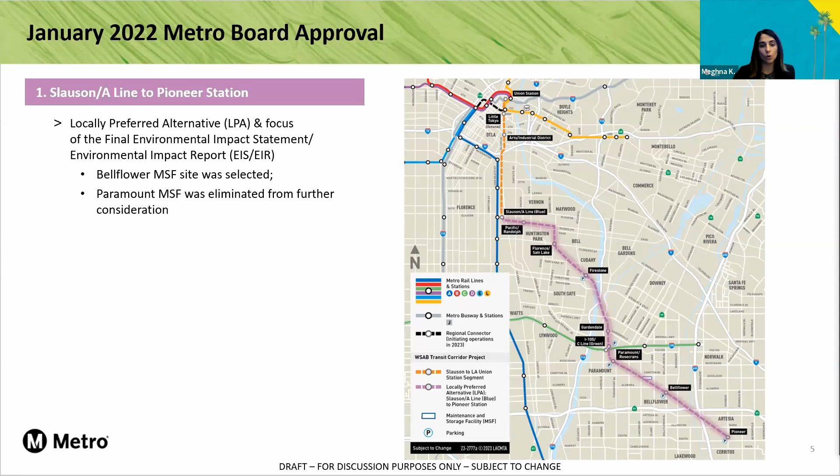Going to the segment between Slauson A Line and LA Union Station, the Metro Board selected LA Union Station as the ultimate northern terminus of the project, and directed staff to conduct a separate study to evaluate cost-effective alignment solutions. We are working on this separate study right now, and findings will be presented to the board later in 2023.

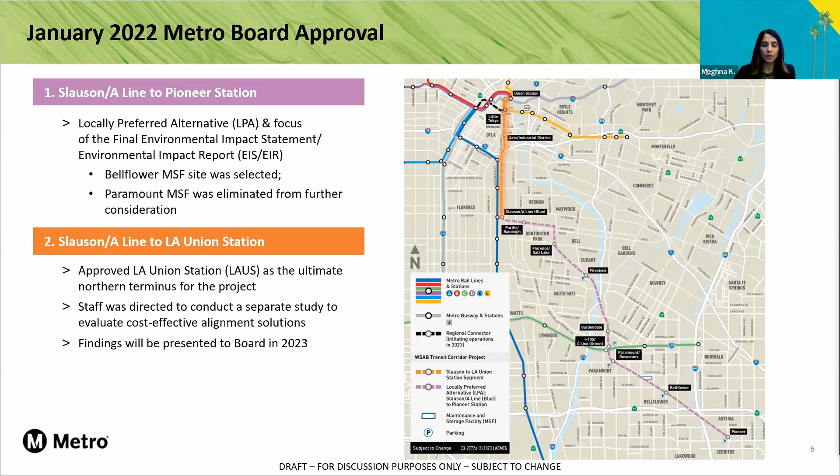So again, focusing on the LPA segment, which is Slauson A Line to Pioneer Station: it's a 14.5 mile segment, out of which 12.1 miles is at grade, meaning it's operating at street level. This runs from Pioneer to approximately 105 on Metro-owned right-of-way, which runs along these cities. Then there are 2.4 miles which are aerial, where we are going over streets or crossing the river.

As part of the project, we have 9 stations planned. There are 6 stations at street level, shown in the dots here, and 3 stations over the street as aerial stations. We are also adding a new station to the current Green Line, which runs in the middle of the freeway. As shown in the green circle, this station will provide a transfer opportunity where passengers from the West Santa Ana Branch can get onto the Green Line and travel to Norwalk or to the airport. So in total there are 10 stations, but the way we define it: 9 West Santa Ana Branch stations and 1 new Green Line station.

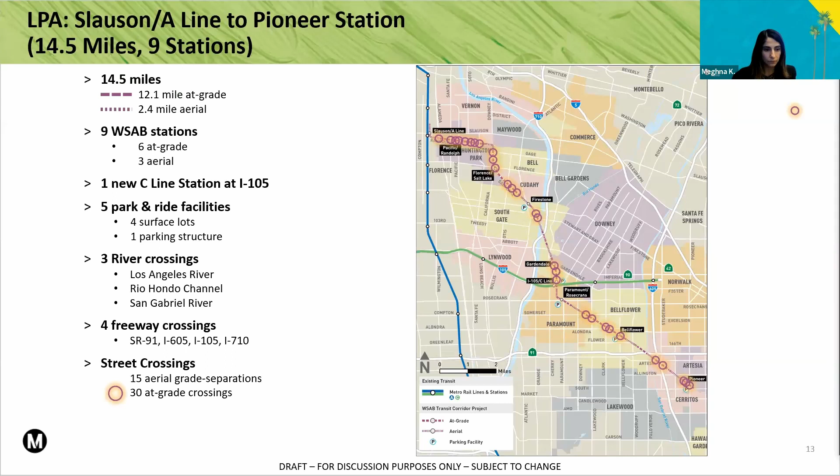In addition to the metro-owned right-of-way between Pioneer and 105, we are continuing to coordinate with Port of LA, Long Beach, and Union Pacific Railroad. The highlighted segment is owned by Port of LA, Long Beach, and Union Pacific up in the north. We will be shifting their tracks - 8.7 miles of freight realignment, not removing but shifting the tracks over and building light rail next to it.

And last but not least, as I mentioned, Bellflower is the maintenance and storage facility for this project.

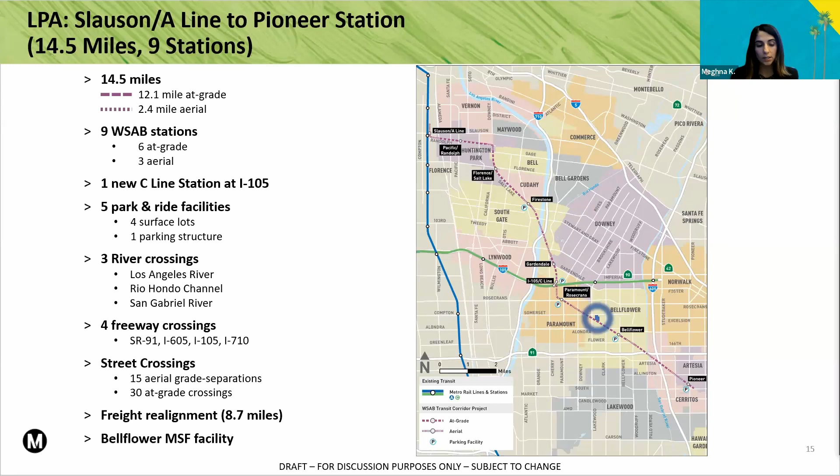Before I get into the project refinements we've made in response to comments on the draft, I want to walk you through some of the typical segments, going from north to south.

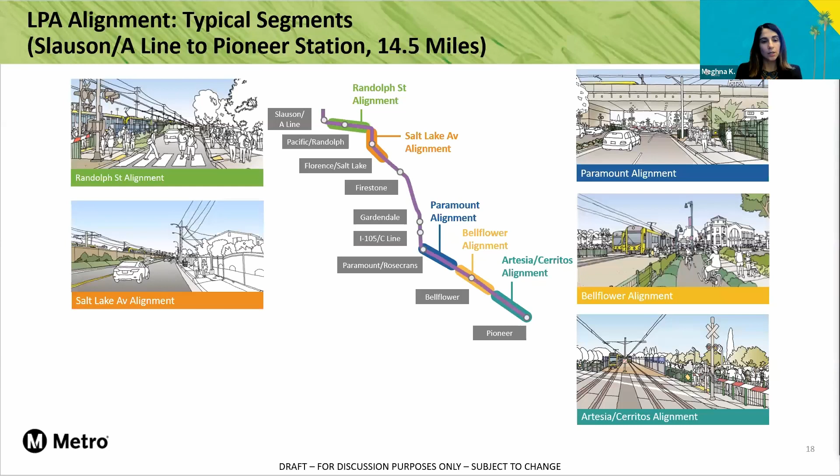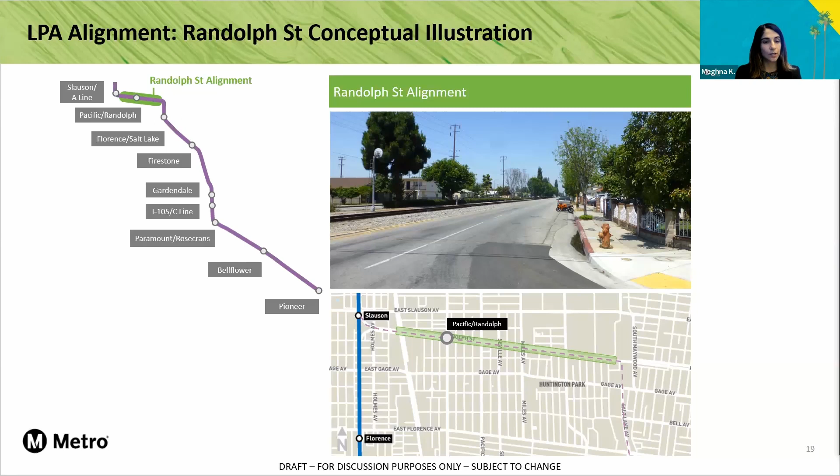Looking at the Randolph Street segment, this runs along the City of Huntington Park. Currently in the median there is a freight track - that's the before condition. Once we build the project, we will shift the freight track, reconstruct it, and add light rail tracks next to it. This is the typical condition along Randolph Street.

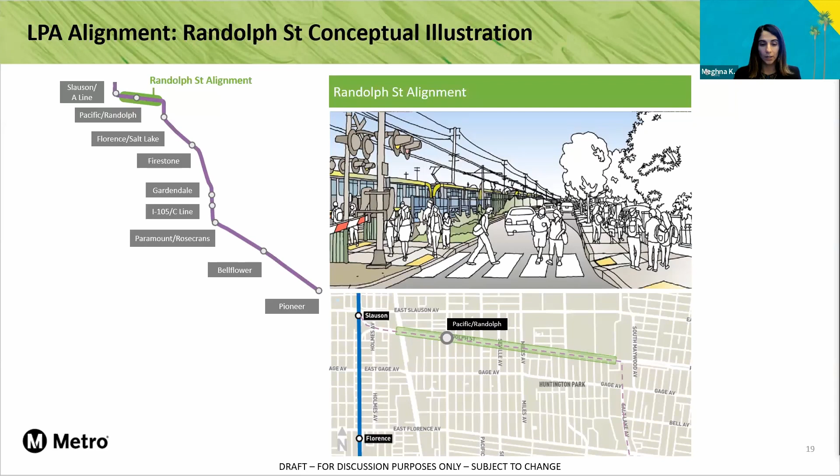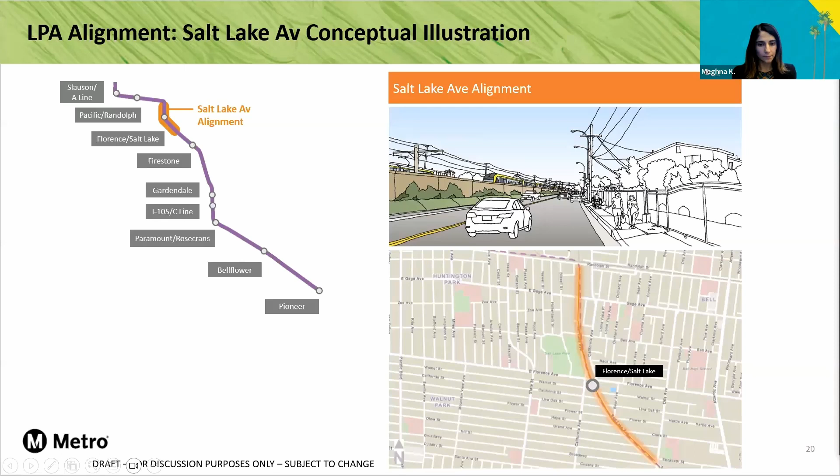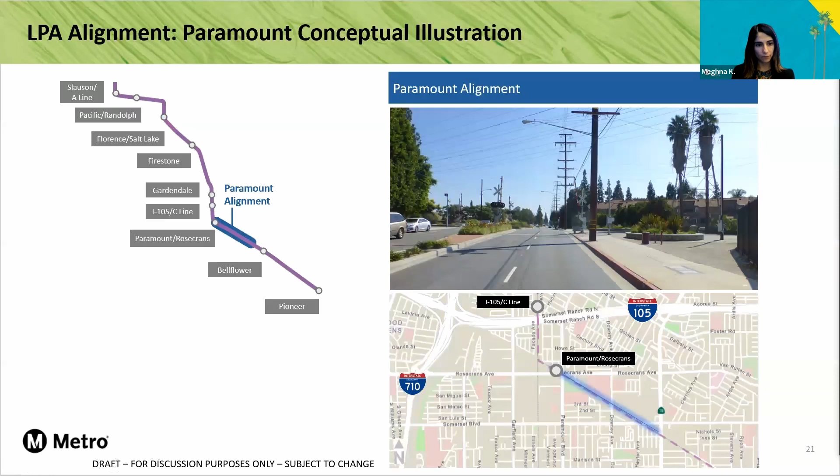Moving to Paramount, this is a view of one of the streets there, showing the aerial alignment I mentioned earlier - an aerial crossing of the light rail. This is how it will look once constructed. The freight train, as shown in the rendering, stays at grade; it's just the light rail that crosses over the street.

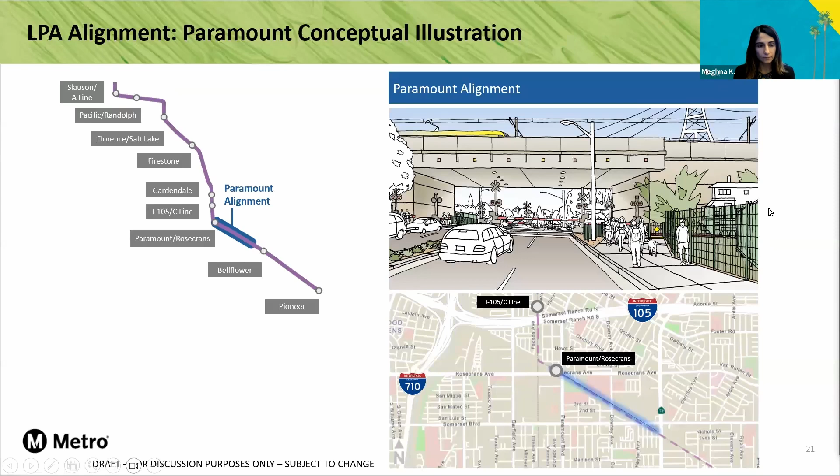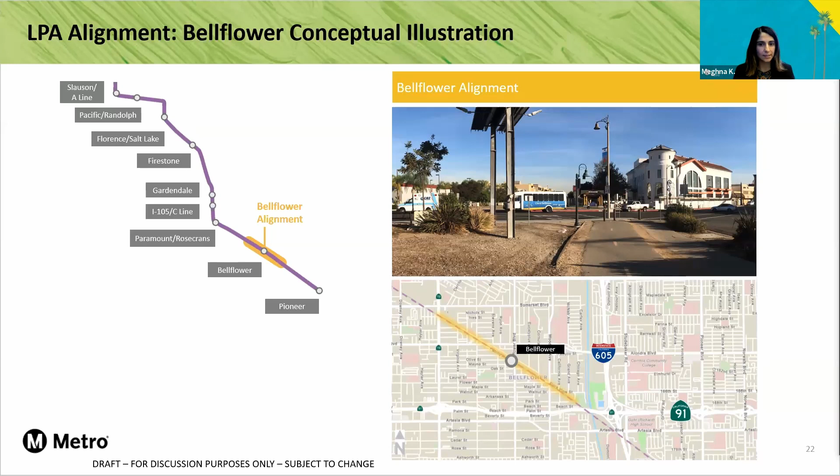This is the existing condition of the alignment in Bellflower. As you may recognize, that's the existing bike trail. We will add the light rail tracks next to it, so this is the view once the alignment is built. At this location there will be a Bellflower station, and this view is very close to that station.

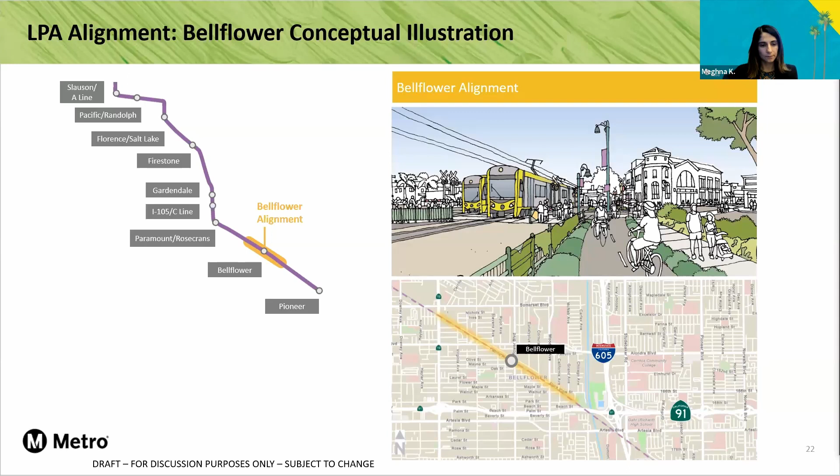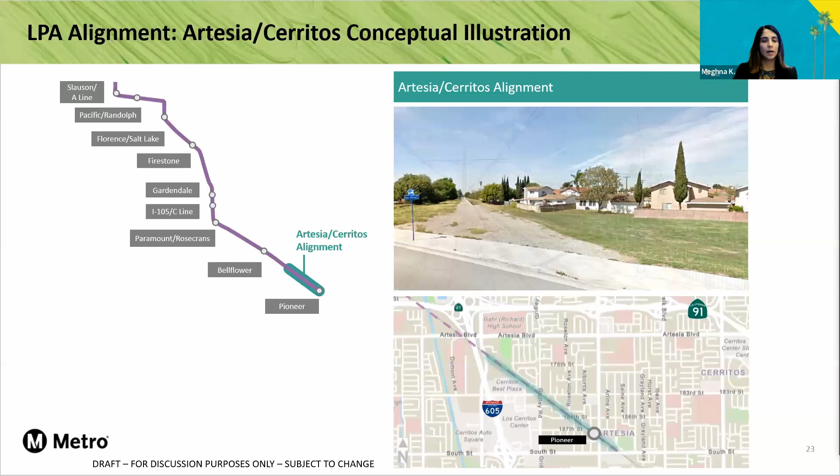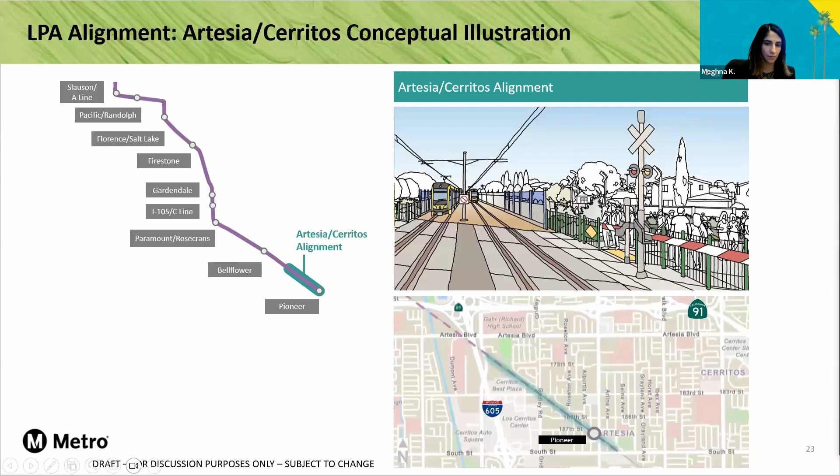Coming south towards the terminus, this is the Artesia-Cerritos segment. This is currently Metro-owned right-of-way. Once we build the light rail, this is how it's going to look. You do see sound walls located next to the residential areas, and we will keep the existing bike path that the city currently has. In the city of Artesia, there's a bike path, so that bike path will be located next to the light rail.

Now talking about the key reason we are here today: as part of the draft release of the document, we got several comments. To respond to those comments, we held several meetings with key agencies, cities, and third parties, and we had to do several studies to address those comments.

Also, we're still evaluating some parking effects in Huntington Park, Bell, South Gate, Cudahy, Paramount, Bellflower, Cerritos, and Artesia. These parking effects will be included in the final document. We do not anticipate these parking effects to have additional adverse impacts, but those will be disclosed in the final document.

Going back after doing all these studies and coordination, we made several project refinements. I'm going to walk you through those refinements in the following slides.

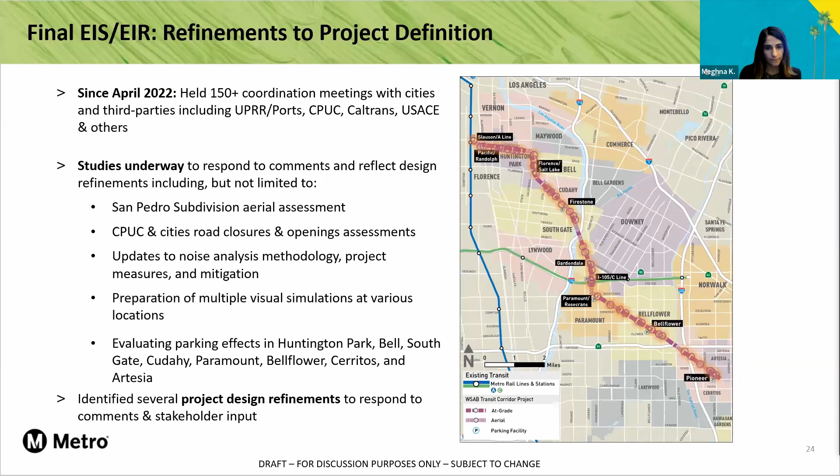Starting in the north, at the Slauson A line station, this is the station which allows for transfer between the West Santa Ana branch and the blue line. We shifted the station south and added additional pedestrian and vertical circulation to allow for ease of transfer between these two stations.

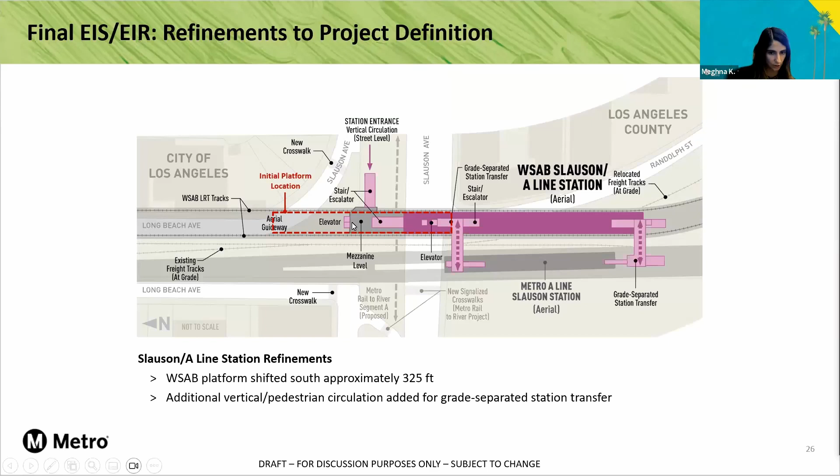In coordination with the City of Huntington Park, we got comments related to street closures and openings. So we opened previously closed streets at Albany and Rugby, done in coordination with City of Huntington Park staff and the California Public Utility Commission, CPUC. We also closed previously open crossings at Malabar Street and Arbutus Avenue. These will be the final design shown in the final environmental document.

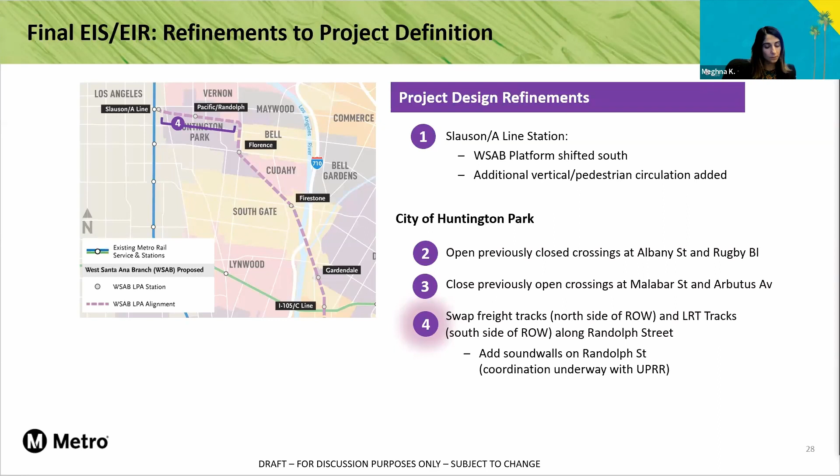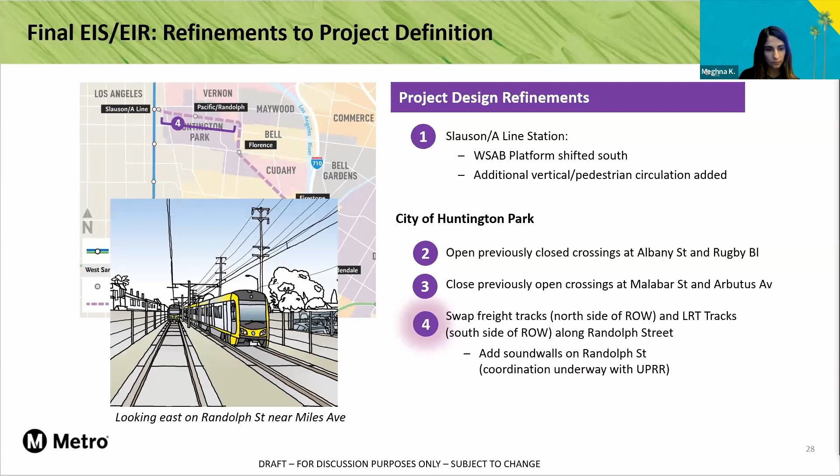In coordination with City of Huntington Park, we also made other refinements, including left turn restrictions at the streets mentioned here, moving some of the traction power substations, and identifying some new laydown areas. I won't spend too much time on this, but if there are questions we can come back to it.

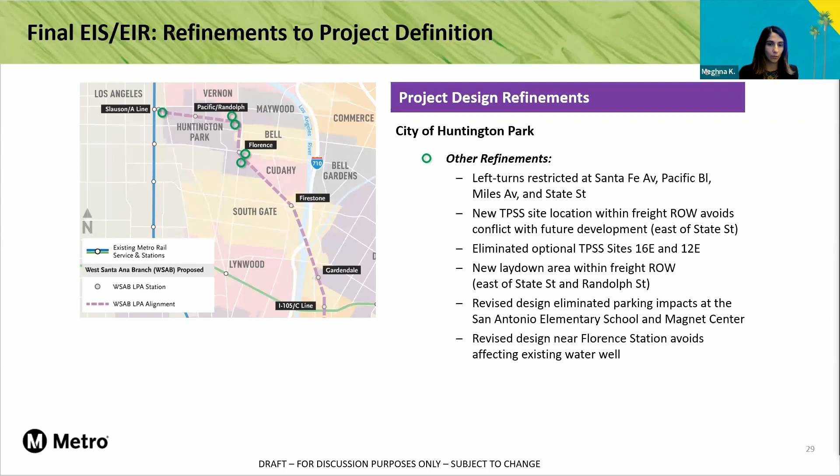For project design refinements in the City of South Gate, we had to work with Union Pacific to accommodate redesign of freight spurs currently serving existing businesses, done in the area around Rayo Avenue. We also identified a new laydown area between Rayo and Southern Avenue. To address UP's comment about providing connection to one of their existing businesses at Imperial Avenue, we had to extend the light rail bridge - the light rail that travels over the street or alignment was extended to provide that spur connection.

At 105, based on coordination with Union Pacific, we have consolidated the parking on the east side. Earlier we had parking on either side of the platforms, but now it's all consolidated on the east side. In coordination with City of South Gate staff, we added a new driveway from this parking lot.

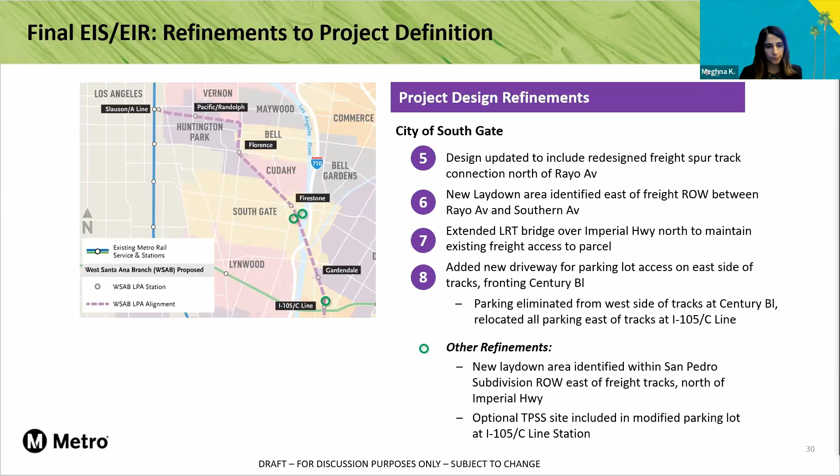This is the key item that we did refine as part of our coordination with Caltrans at the 105. This is the area where we are going over the freeway, so we have redesigned the 105 freight bridge.

Transfer between the West Santa Ana branch station located north of Century Boulevard and the new Green Line station that we are adding in the middle of the freeway.

In order to do that, we have to demolish the existing freight bridge that's there, but we are shifting that freight bridge and rebuilding a new one next to the light rail bridge.

Previously in the draft document, we were also demolishing and reconstructing the Facade Avenue and Arthur Avenue pedestrian bridge, but no longer are we demolishing those bridges. In coordination with Caltrans and our Express Lane project, we were able to leave those bridges as is.

The only change at Facade Avenue would be we will be adding vertical circulation elements from the Green Line to connect to Facade Avenue. But right now, based on feedback from the city, this would be only for emergency egress purposes.

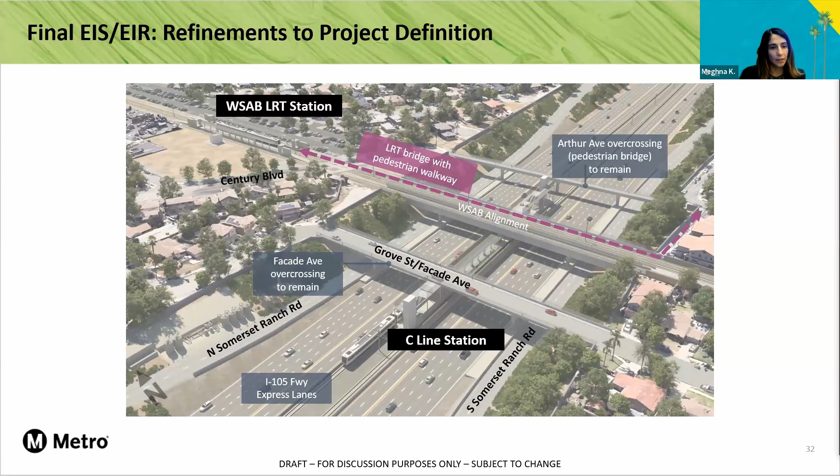City of Paramount, in coordination—not just with City of Paramount, this was a comment that we received from several cities—and as part of the concern was privacy, especially along the aerial alignment adjacent to residences.

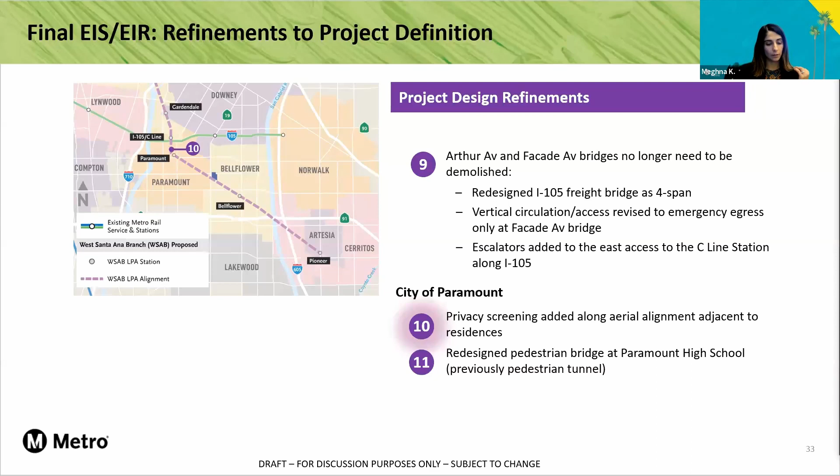People were concerned about visibility into their homes. So to address that comment, we are going to be adding privacy screens along the alignment wherever it's aerial next to residential.

So we will be adding these privacy panels for the entire length of the project, wherever the alignment is aerial next to residential.

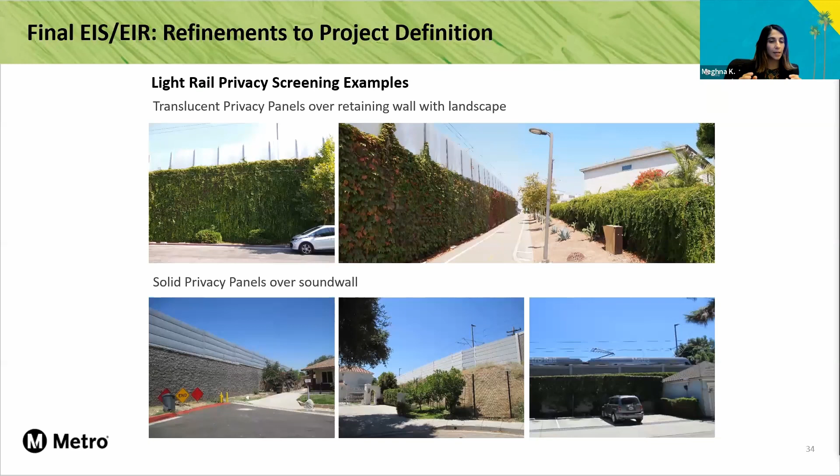Now getting into City of Bellflower, in coordination with the city at the maintenance and storage facility, we have shifted the entrance to align with the existing street.

If we go to the next slide, this is how it will align with Bayou Avenue, and we will be adding a crosswalk and signal. This will help the traffic safety concerns and also allow for easy crossing across the street.

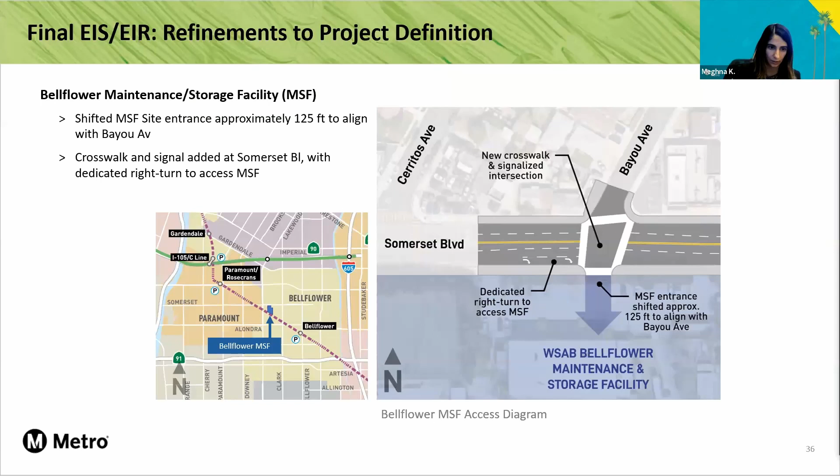Now getting into City of Cerritos and Artesia, for the park and ride entrance, we shifted the entrance to align with the access called Solano Place for one of the commercial properties. In addition, the city wanted us to accommodate an alley.

We are adding that alley egress, which meant that we had to add an additional floor to the parking. So it's a 5-story parking structure.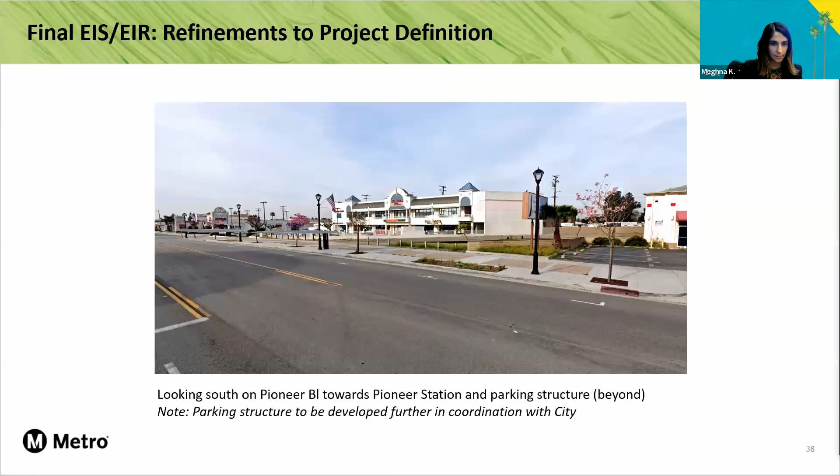This is the existing view, and that's the massing to show that 5-story structure next to the station. The parking structure can be further developed in coordination with the city.

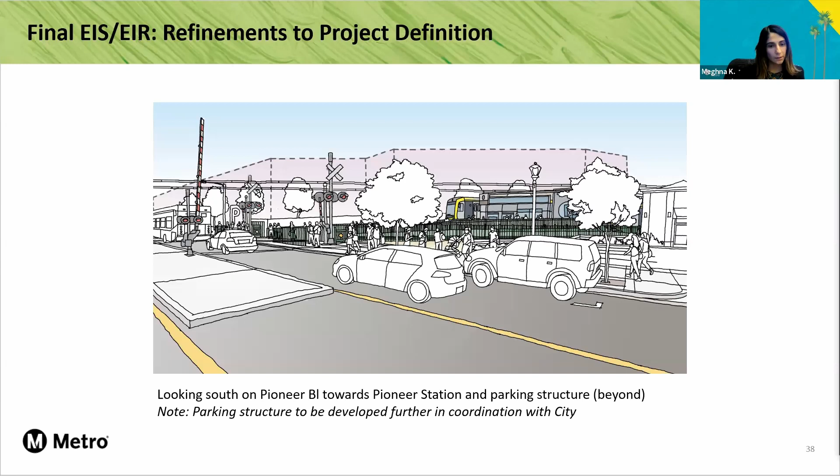Pointing out another key refinement that we have made, the city made some comments about changing the retained fill, which is basically a solid wall that supports the aerial structure, to columns.

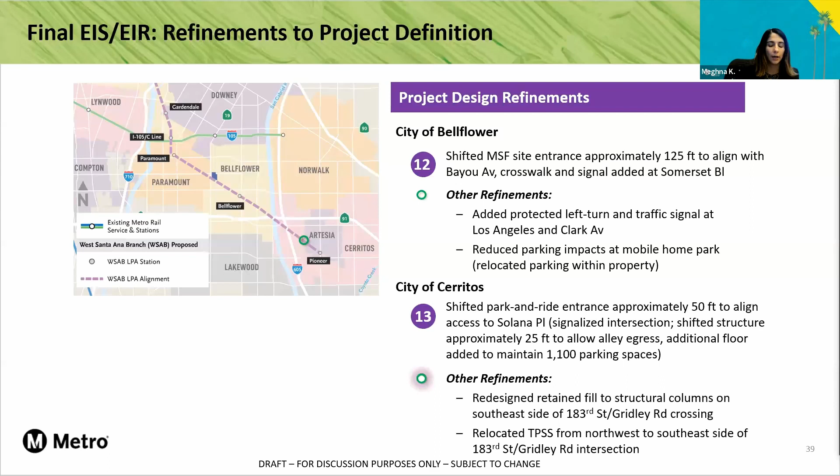If we click, this is a view, as you may all recognize, of the existing bike trail in Artesia. This is how the light rail would look like, and as you see, we have changed it to support that aerial structure with columns.

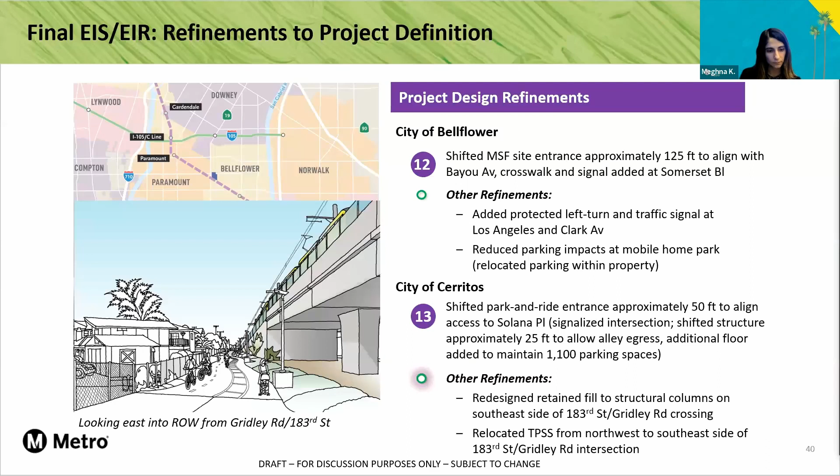For City of Artesia, in coordination with the city and California Public Utility Commission, we added a design option. In the draft, we were closing 186th Street—actually, we were keeping 186th Street open and closing 187th.

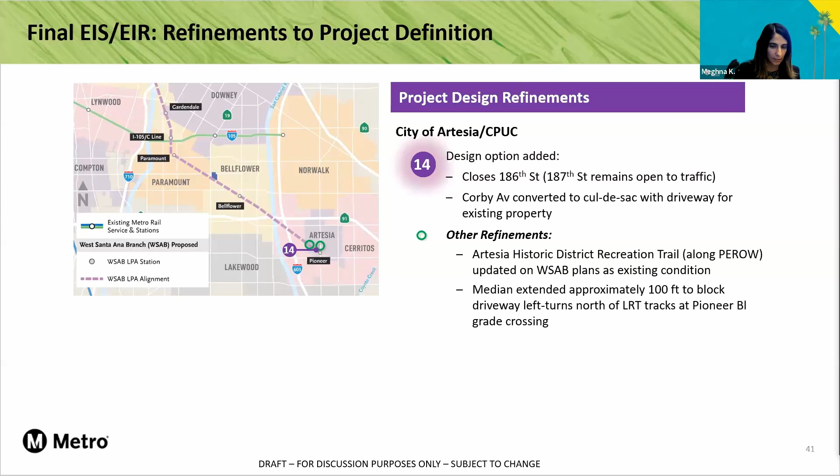But we have added a design option, and as part of the meeting today, we would like to get your feedback or preference. Right now, the design option, as you see, closes 186th and 187th Street will be open to traffic.

So please let us know if you have a preference of 186th versus 187th. I'll take a quick pause—Yvette, are we doing the survey now?

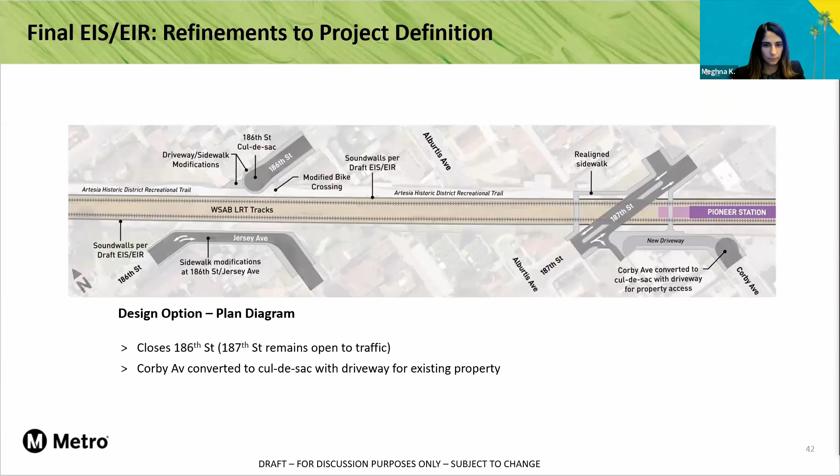We have 17% preference for keeping 186th Street open, 27% voted to keep 187th Street open, and 56% have no preference.

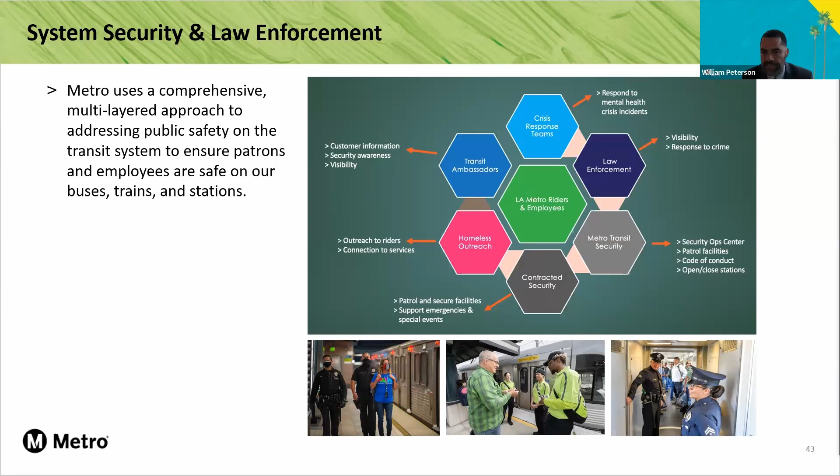And the reason I mention it is because we're looking at that pilot and we're making adjustments. What is working at MacArthur Westlake, given it is one of our older stations, and what is not working. And we're constantly improving the areas that we're deficient in or things that can be improved, with the eye of expanding those lessons learned throughout our entire system. Next slide, please.

These are some of the other things that we're expanding with regard to improving public safety. We are upgrading our closed circuit TV systems to new state-of-the-art systems. That's currently in progress, as well as the software that's utilized to analyze that video intake, which goes to our central location, our command center, so it can be analyzed and resources can be appropriately deployed to those areas that might be problematic.

Emergency blue light call boxes, those are something that we're expanding upon. Not everyone has a cell phone, and sometimes there may not even be a cell signal. So that being said, we want to give people an alternative to communicate with us in the event that there's an issue that arises.

The Metro Transit Watch app, this has been a very big success for us. It's very easy to download for the general public, and it is basically the main mechanism of reporting crimes and inappropriate behavior to our SOC.

We have 2 SOC stations which analyze all of this information that comes in. And when a user utilizes the Transit Watch app, they're in a position to actually designate certain things that they see, whether it's uncleanliness, whether it's inappropriate behavior. And all of that information goes into our SOC, we review it, and then we respond appropriately and accordingly.

Next bullet here, we are actually increasing. I mentioned our MTS officers. We are increasing our numbers to 42. So that will be an additional complement to this physical security structure that I'd mentioned before. And lastly, we're increasing the number of homeless engagement and crisis intervention teams.

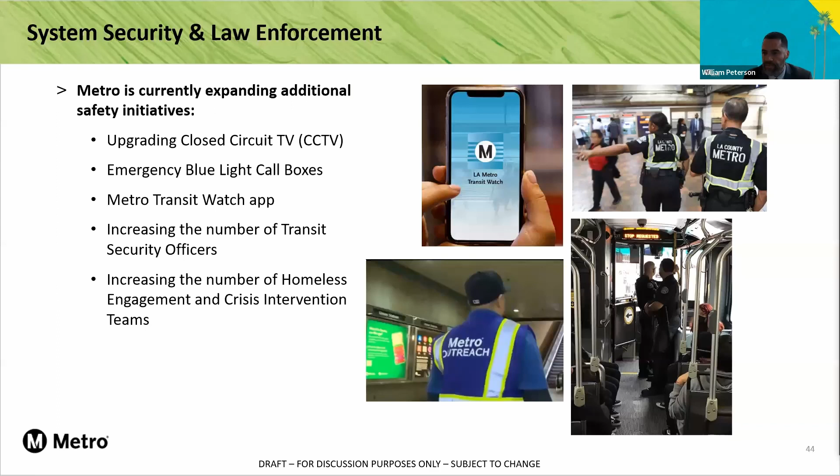Those right-of-way requirements are then appraised by an independent third-party appraisal. We take that number and we prepare what's called the purchase offer. Metro staff will sit down with each owner, present the purchase offer, and enter into really active negotiations. It's Metro's intent to engage in active negotiations and reach a voluntary settlement. Once the settlement is reached, we'll go ahead and open escrow. Metro staff will be there to assist in guiding through the escrow process.